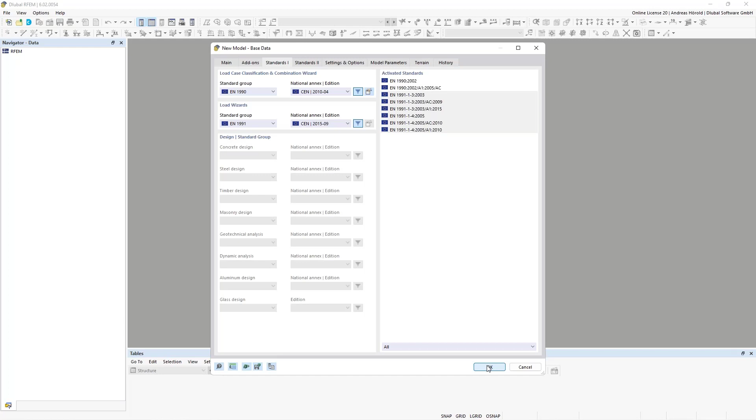So, at first I will modify the grid. At the bottom, right-click, edit. I would like to have a space between the grid points of 1 centimeter. Our connection is only 10 by 15 centimeters large, so I change the units for length from meter to centimeters. Then I change the grid to 1 centimeter.

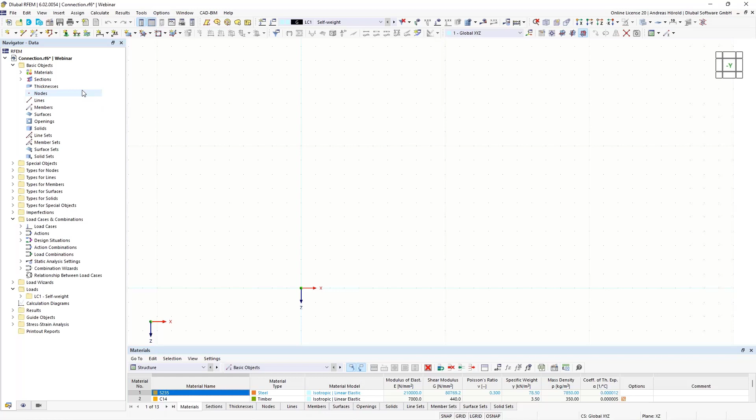Right above, I change the work plane to XZ, and I look in the minus Y direction. I zoom in, and now I can start here, left above, with a new line.

3 lines, 10 centimeters large, and I will stay in the dialog but change to arc, and draw an arc. That's all, and now we can create the first surface, the edge of the solid.

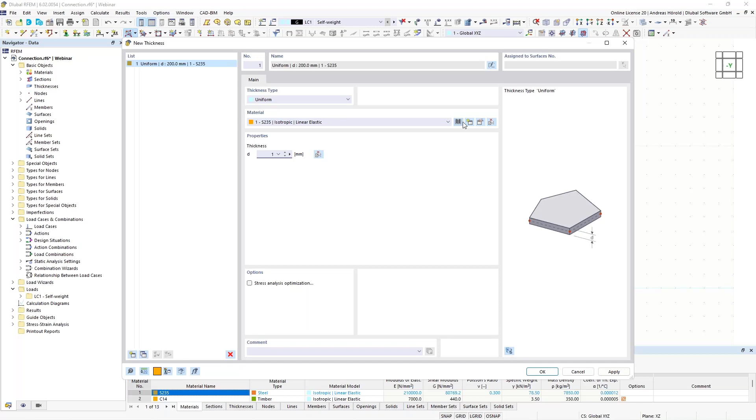Here, left above, I select the boundary lines. We have to define the thickness and the material with this button here, create new thickness. The thickness can be 1 millimeter, it doesn't matter, because when I create the solid or extrude the surface into a solid, the surface will be without thickness. The material is okay as the steel S235, but I'll show you where you can find it in the library.

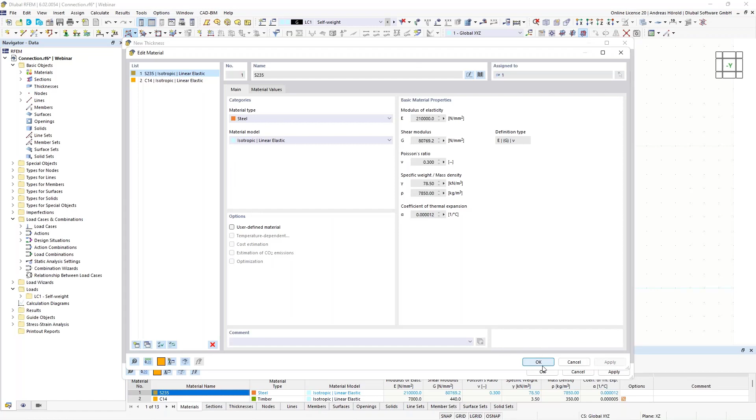European steel, and I select the steel S235. Okay, so I select the boundary lines, and the surface was created.

Then I create an opening here, left above, opening circle, with a radius of 2 centimeters.

So now, left above here, a new node. I create a new node on that point here. And I use, right above, the function connect selected lines, in that case at intersection.

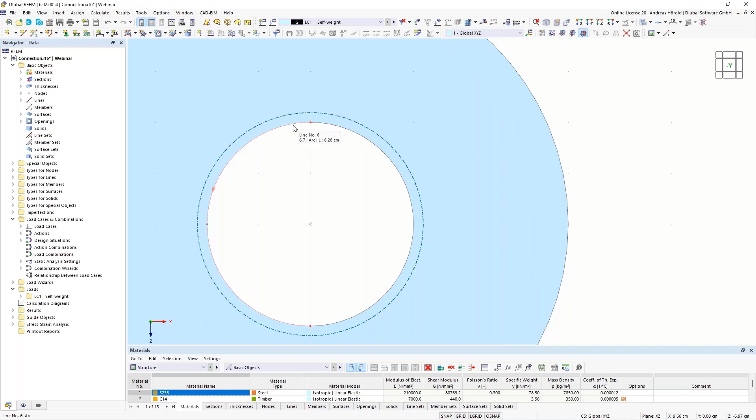Now the circle is divided and there are 2 lines. The reason for that is that later I will create the bolt, and between the bolt and that surface, or in that case the solid, I will create a contact solid, and the load on the bolt should be only on that side of the bolt - force in X direction. That's the reason why I did that.

Okay, now I create a solid: right-click on the surface and then extrude surface into solid.

And it depends on the surface coordinate system, in which direction is minus and in which direction is plus. In that case, in plus direction, it goes to that side. I switch, or I extrude it to the other side. That's why I select here or enter -7.

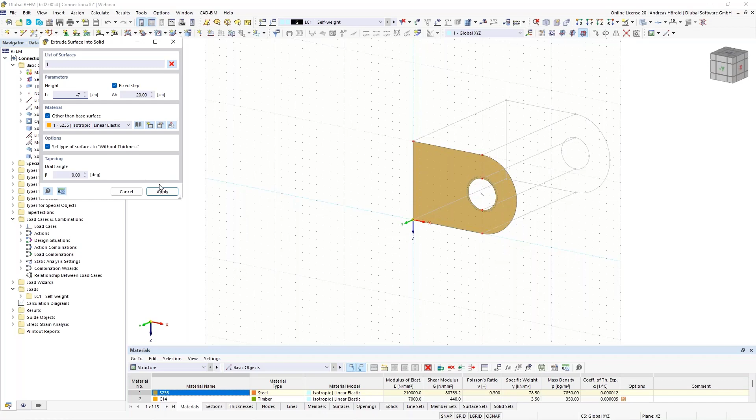Material is okay, and the boundary surfaces should be without thickness. I apply, okay, and the solid was created. And now the boundary surfaces are without thickness.

That means the surfaces haven't got any stiffness. So then I change to the view in -y direction again. So, or at first, I double click on the solid. That was wrong.

On that point. Or you can also search the solid here on the left side in the navigator data and double click or right click and edit the solid.

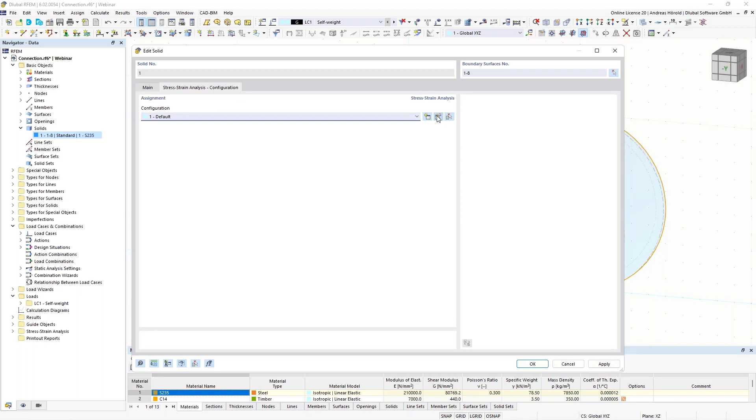So there's a stress strain analysis configuration. It's default at the moment. I would like to edit it to check that. Yeah, and it's quite okay.

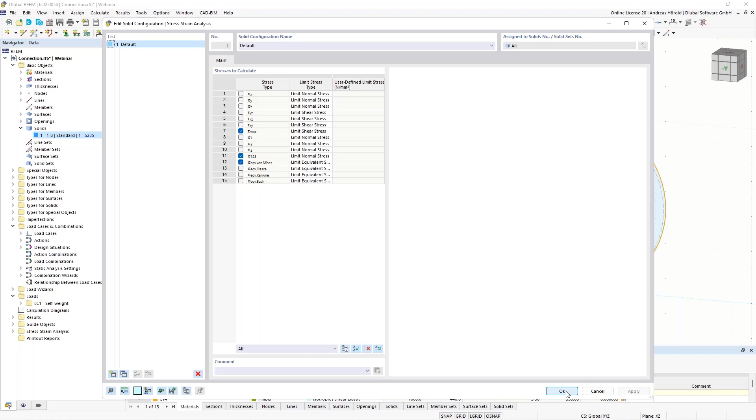Tau max, the sigma 1 to 3, and the sigma with the equivalent stresses. So, and those are the principal stresses, the sigma 1 to 3. Okay.

So now I create the next surface, a circle. No, that was wrong. The next step should be, I would like to create this solid. I will show you what I do.

Just a moment. I select that node here and copy it in minus Z direction, -2 centimeters. So I create a copy and change the work plane in

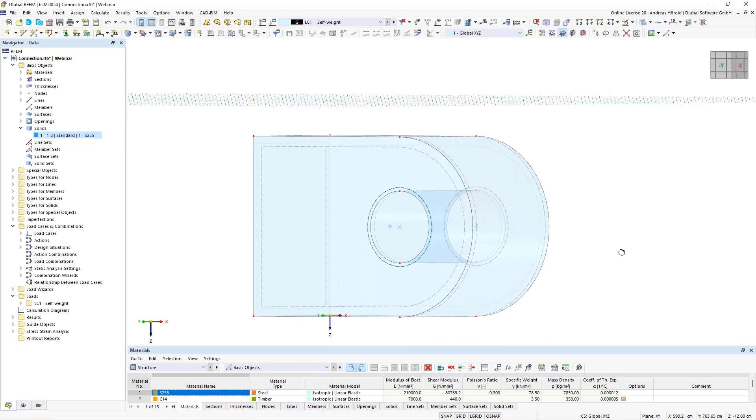XY. Okay. And I change the work plane origin to that side. Okay. So I deselect this solid, hide selected objects, and view in Z direction.

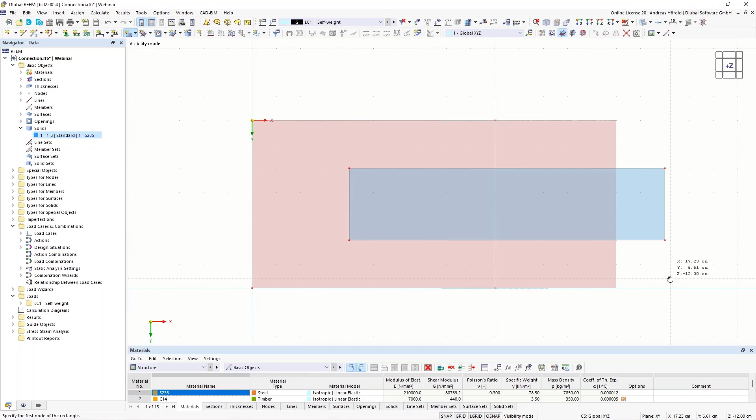So, and I create a new surface, a rectangle. Yeah, that thickness is quite okay. And from that point to that point. So, and I extrude it.

So, yeah, 20 centimeters are okay. Yeah, for that solid, we can choose, for example, material timber. Okay, because in the next step we will do the operation of this solid minus this solid with the Boolean operations.

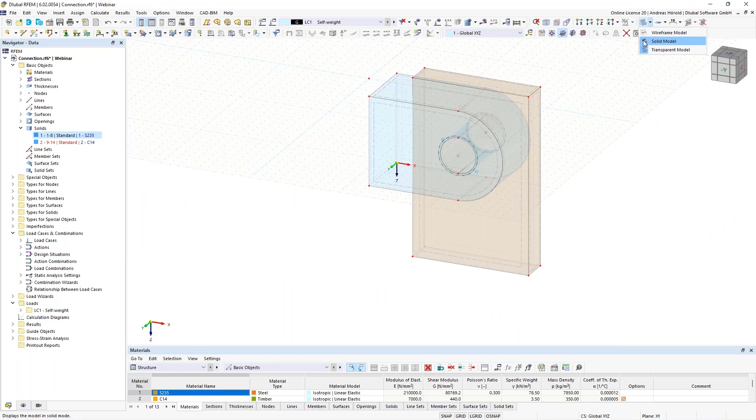So I cancel the visibility mode and so. Okay. So, and in the next step, as I said, I delete this node. In the next step, we will subtract this solid from this solid. So I right click on that solid and edit it.

So, and I choose the solid type hole. Okay. Can't be, that's okay.

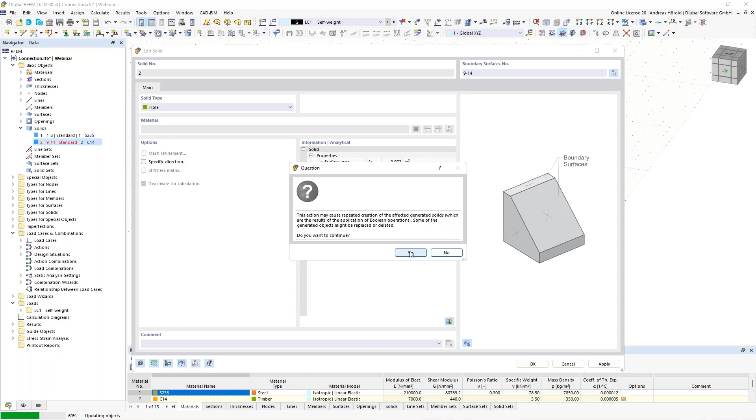So, and now the new solid was created. That's the original solid. That's the hole. And this one is subtracted by this one. And we subtract this one from this one, and that's the new solid.

Okay. So, and I do right click on the generated solid, edit, and on the left side at the bottom, I cancel the generated state because we would like to work only with this solid. Okay. So, and now we can delete the hole solid.

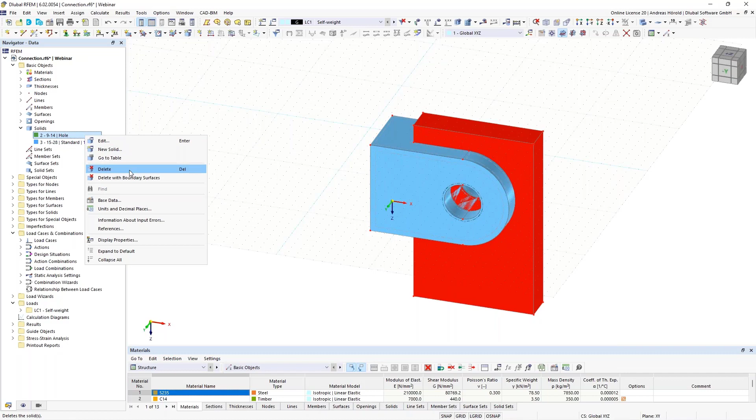Right click, edit. No, right click, and then not only delete, but delete with boundary surfaces. That's quite important. Okay. And now our main solid was created.

I can go in the table. Where are the solids? I delete those lines, delete row, delete row. Okay, now our solid is solid number 1. It's better for the overview.

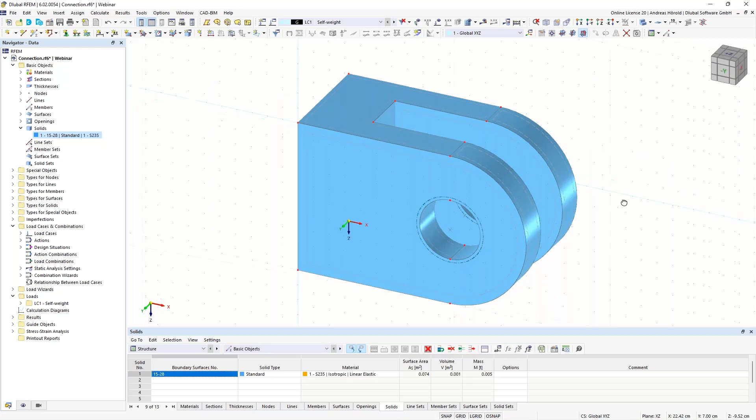So then the next step, I change the work plane to XZ and the origin to that point. Okay. The work plane is correct, and we take a look in -y direction.

So in the next step, we create the circle. With the same thickness and the same material, that's okay. So, and with a radius of 1.9 centimeters.

So, and we divide the circle with a line. I change to the wireframe model. Here left above with a new line. Okay, in the middle.

So, and then right above with the same function, connect selected lines at intersection. Okay, I can delete this line. And now the lines for the bolt are also divided into 2 parts.

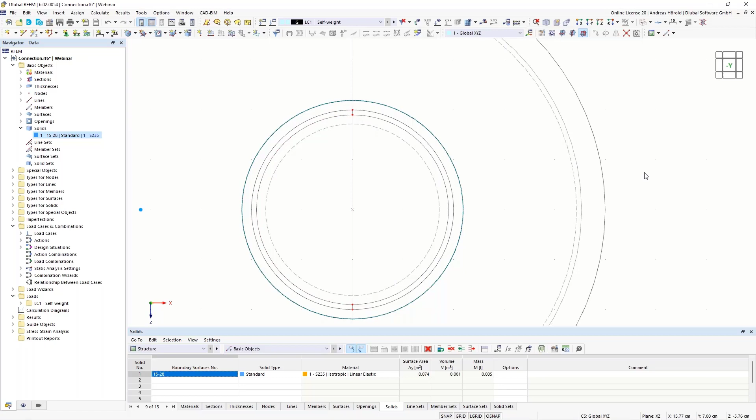So then I extrude it. It's better for the overview. I extrude this circle as well. Surface into solid. -2 centimeters S235. Okay. So.

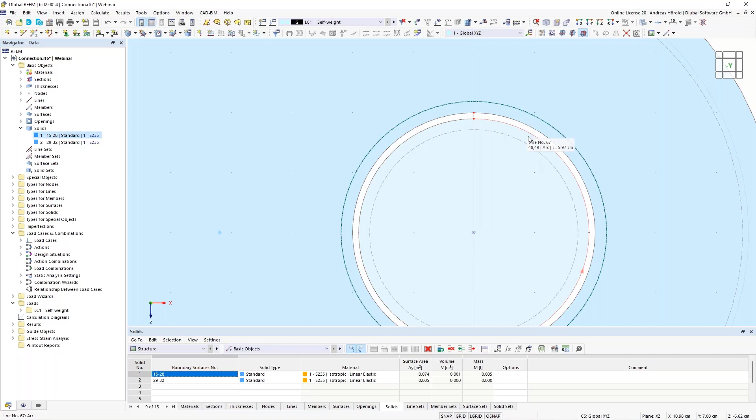And now I would like to create the contact solid. Only half here, such a ring in the space between this main solid and the bolt. And that space here. If you wouldn't have any space between the surfaces, those are the boundary surfaces.

And when you haven't got any space between them, you can create - I will show you - surface releases, such surface releases. But I will use the space for a contact solid. So that's why, in the next step, I will create the boundary surfaces.

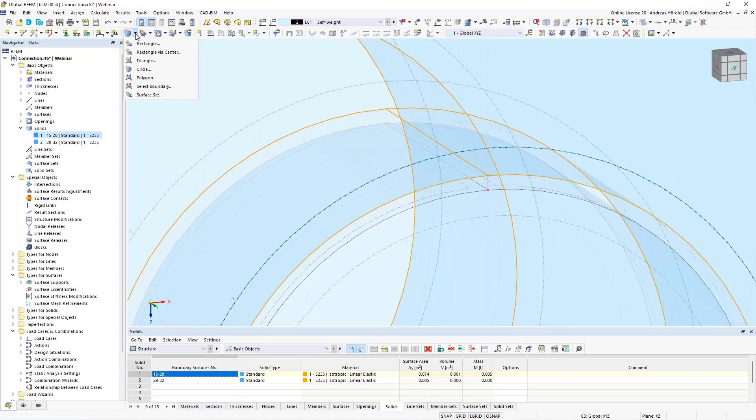I create a new surface, polygon in that case, without thickness this time. Okay. I start with this one.

Okay, so I zoom a little bit out and in, so the same at the bottom.

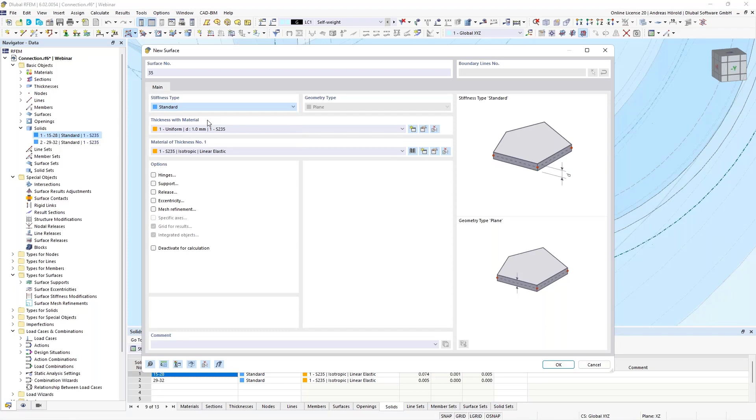Okay, then another function, select boundary, without thickness. I forgot to do it for width of that surface. I will change that later.

So, and I can double click on it and change it to without thickness.

So I copied that surface from that point to that point. Okay, so now all boundary surfaces are created, and I can create the new solid, the contact solid.

With that button here, set new solid, or you can right click here and define or select new solid. So standard, yeah, at the moment standard is okay. We will change it later.

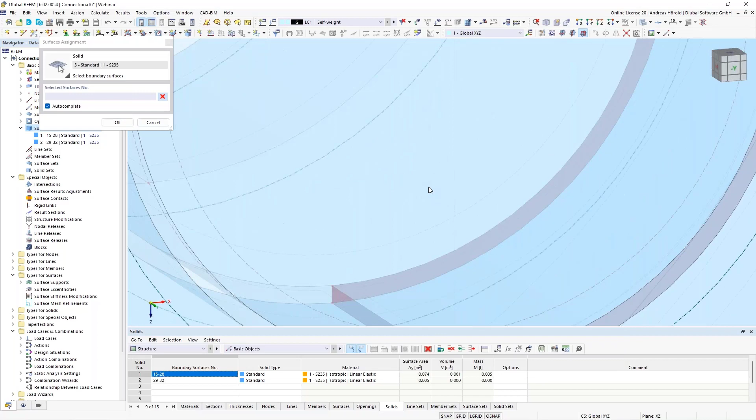I select the boundary surfaces, so this one. I have to deselect the autocomplete. So this one, this one, this one, this one.

Change to the wireframe model. This one, and only one is remaining. Okay, we can check it. So that's okay.

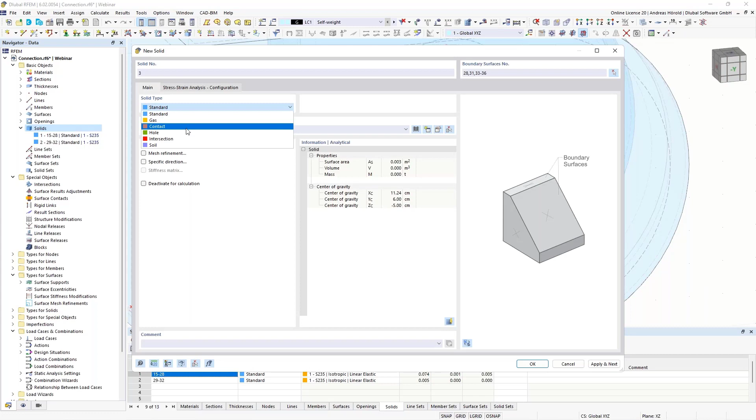Yeah, and we can also change it to the contact solid, and we have to define the contact conditions.

So with that button here, create new contact. There are different possibilities: full force transmission, failure under compression, failure under tension. We will use failure under tension, that the bolt isn't glued and at the edge of the hole.

So then here, rigid friction, yeah, you can see different possibilities. Rigid friction, yeah, I define a small friction factor. We won't have any friction in our system.

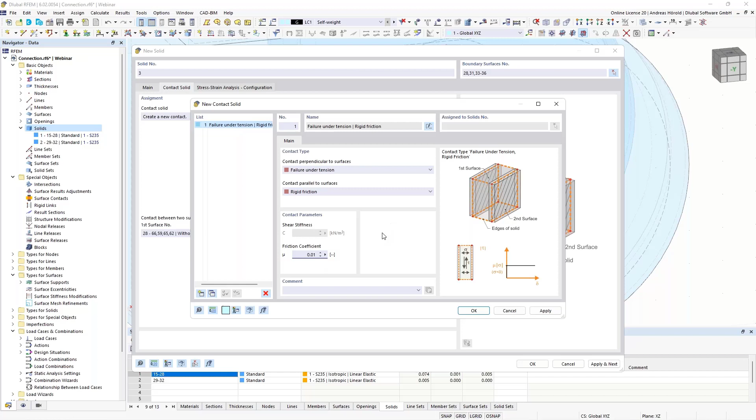Okay, so, and we have to define the opposite surfaces, that surface and that surface. There are already a proposal, 28 and 31. We have to check it.

Yeah, 28, and I have to go to the wireframe model. 28 and 31. Yeah, that's okay.

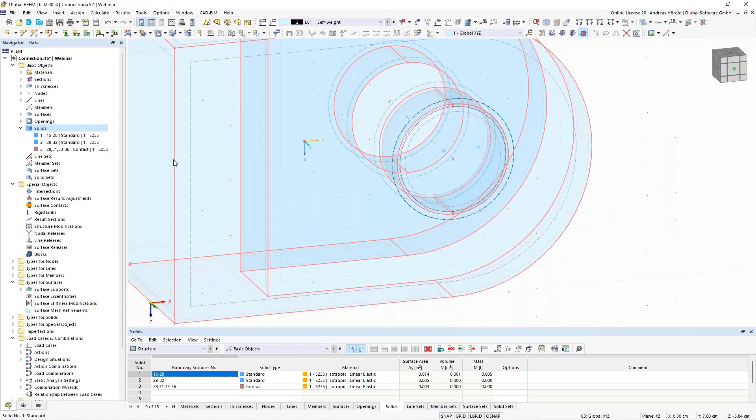So I can leave the dialog, and the contact solid was created. You can select it, and you can see it, yeah, in the space between the bolt and the plate here.

So now I mirror the contact solid with that function here, create copy. YZ is the plane, and I select the point in the middle of the circle.

Okay, that's all. That part of the bolt and the contact solid was created. So I copy the complete bolt to the other side.

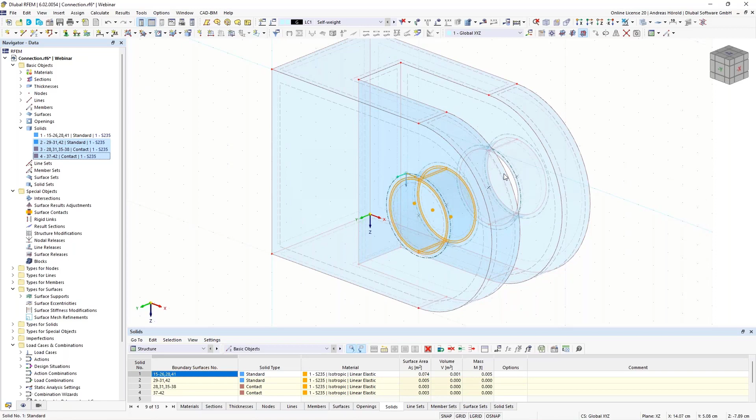Copy, I have to change the vector from here to here.

So, and in the next step, I have to fill out the space and the overhang. I enlarge the bolt here.

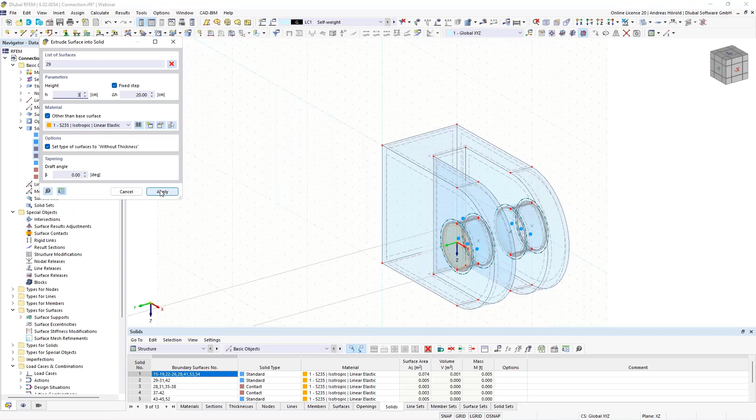So with the extrude function, 3 centimeters, S235. Okay, same on the other side. That goes quite quickly.

So minus 3. Okay, and the space here. Also minus 3.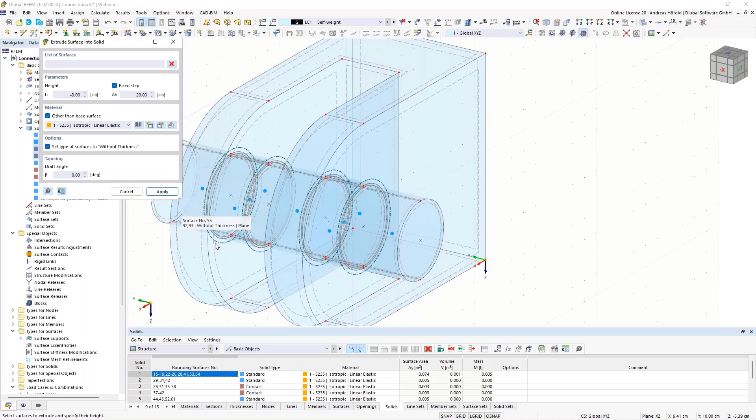So the model is complete. What is missing? Yeah, we will support in the first step that surface, edit surface, and I add supports.

Here above, I change the dialog, support, create a new support. Now it should be rigid in all directions, or fixed in all directions.

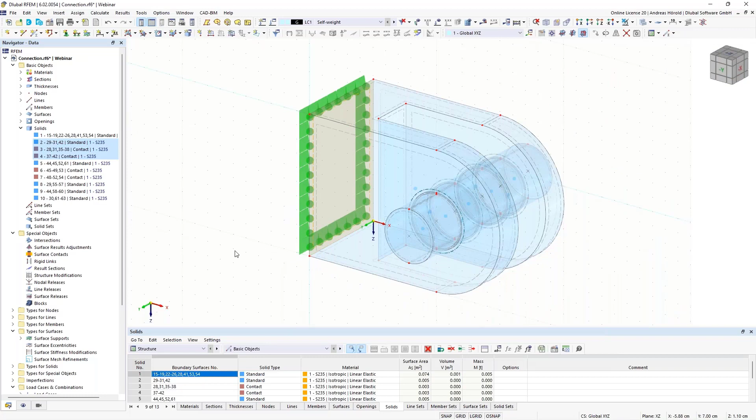So, and now, yeah, for that we can check if the model is complete and is okay, we calculate the self-weight load case that was created automatically. Yeah, it should be fine.

So, and you can see there is a quite rough mesh, and I would like to show you a function or a feature. So in the navigator display, you can see the mesh.

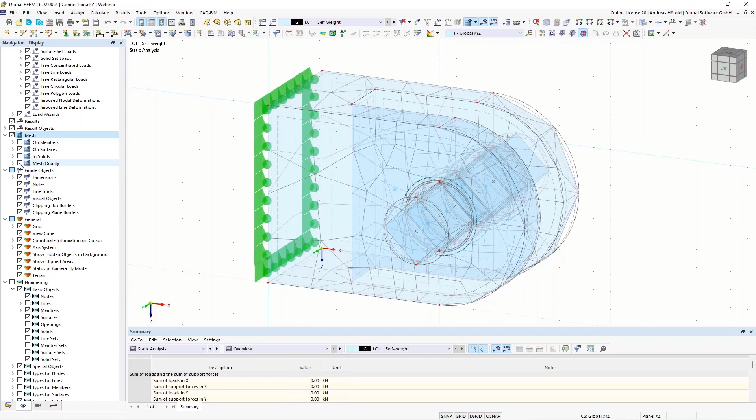You can disable it, and I would like to introduce that setting here, or that function, mesh quality. Where is my panel? That's on the other screen. Okay, and when you click that button here, you can see the mesh quality.

Yeah, 80% are okay, 20% are a warning. That's quite clear with such a rough mesh. I can show you the mesh settings. Yeah, that's quite rough.

We change it to 1 centimeter, and you can see the quality criteria for the solids in the dialog here. If you have a ratio larger than 1 to 20 for the sizes of the mesh or of the element, then you will get a warning and a failure with that aspect ratio and parallel deviation and so on.

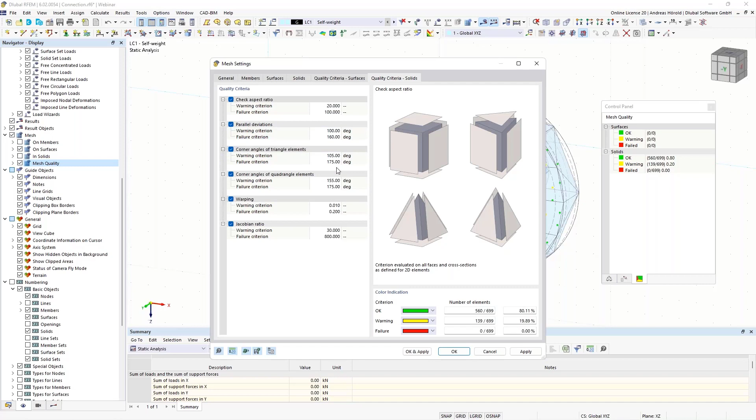Okay, and apply. The program creates a new mesh, and you can see 99% are okay, only 1% deliver a warning.

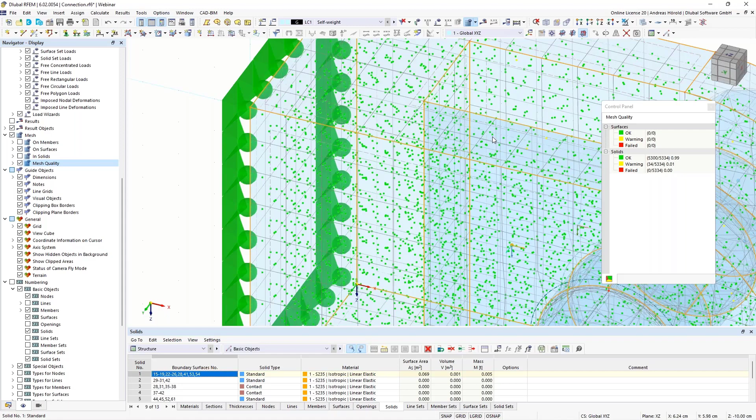Yeah, I will calculate with that mesh because I would like to get a short calculation time in that webinar. Actually, we recommend minimum 4 or 5 elements on the smallest side here. At the moment, there are only 2 elements, but for the webinar and to save calculation time, it's quite okay.

I can disable the mesh quality. Okay, and I can also, with that setting here, disable the mesh.

Okay, then we have to apply a load on, as I already mentioned, on that surface and that surface and that surface. Okay.

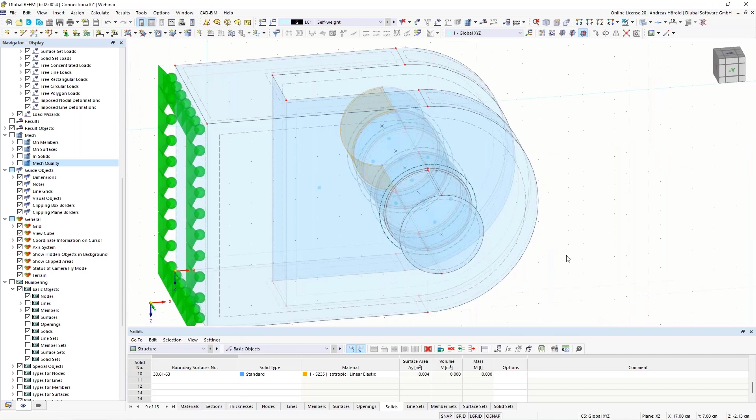So I would like to apply a load of 3 loads of 35 kilonewton, but I have to apply it as a surface load. That's why we have to calculate the surface load.

I measure with a double click. I can edit the surface and it displays the area. To have the exact value, I have to go to the left side at the bottom and change the units and decimal places for the areas here to 6 decimal places. Now I can write down the value here for surface number 57.

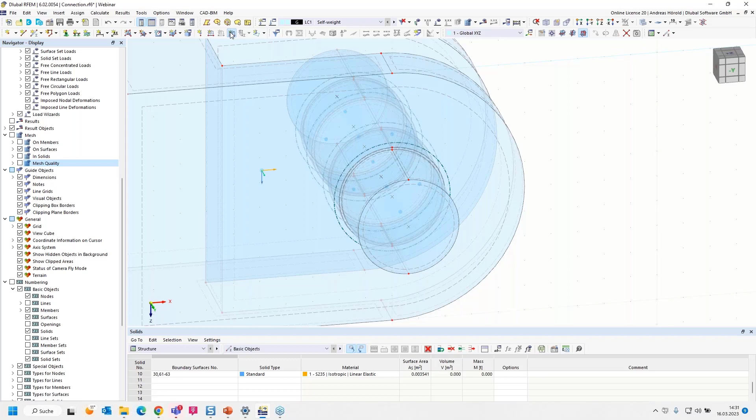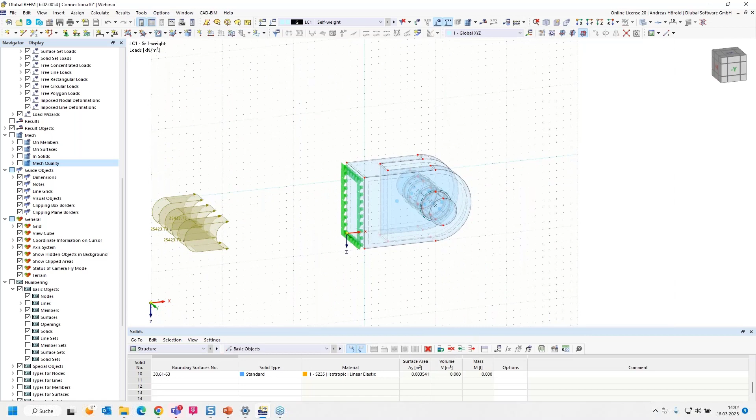Okay, so we can move the load a little bit. You can also find the load on... I have to change the taskbar so that I can see all. In the navigator data, you can search for the load. At the moment it is the self-weight load case, we will change that. I can see the surface load here, and if you double click on it, we reach into the same dialog.

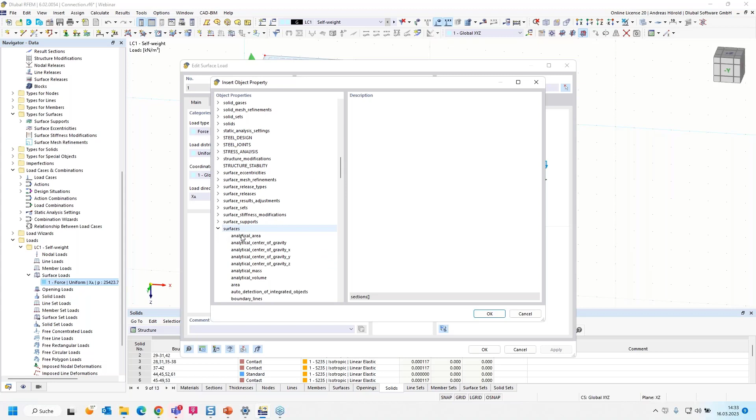I would like to show you another possibility to calculate the surface load with a formula. So I enter 45,000 Newton, SI units - we have to use SI units - divided by, and here with the info button, you reach a table with different object properties. So I search for surface, then surfaces, other surfaces, and area. I enter area number 57.

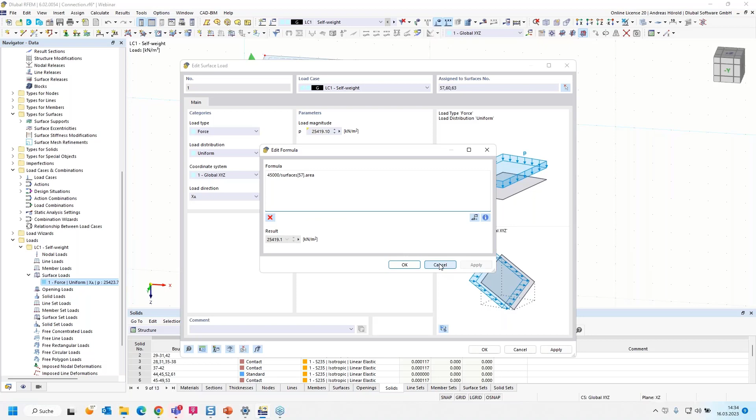And you can see the surface load was calculated, and there is a small difference, only a small difference, but that is the correct value. If you want to change the load later, you can go to the formula and only enter the load here. I think it's a really good feature.

So in the next step, I go to load cases and combinations. That's the current load case, I call it FD. We apply loads with safety that already contain a safety factor. So then for the design situations, I delete the design situations for the serviceability limit state. We only work with the ultimate limit state, and we have to activate the stress strain analysis for it. Although we have only one load combination, one load, we have to create design situations because you can only activate the add-ons for design situations in RFEM 6.

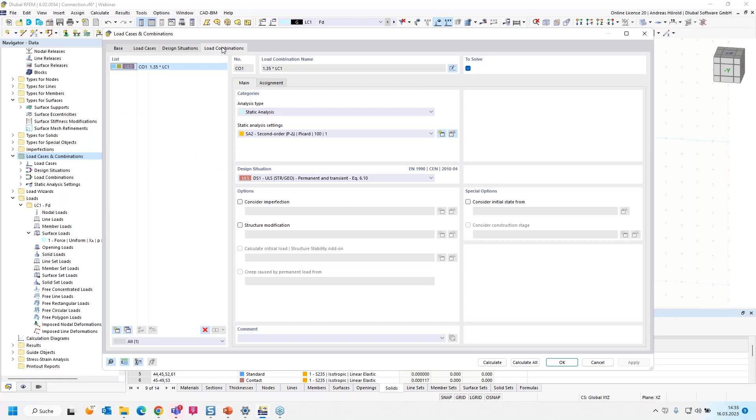Okay, I turn to the base data. I disable the combination wizard and keep the load combinations. I only change the safety factor because we already have got design loads. So the design situation contains only this load case. And then we can calculate all.

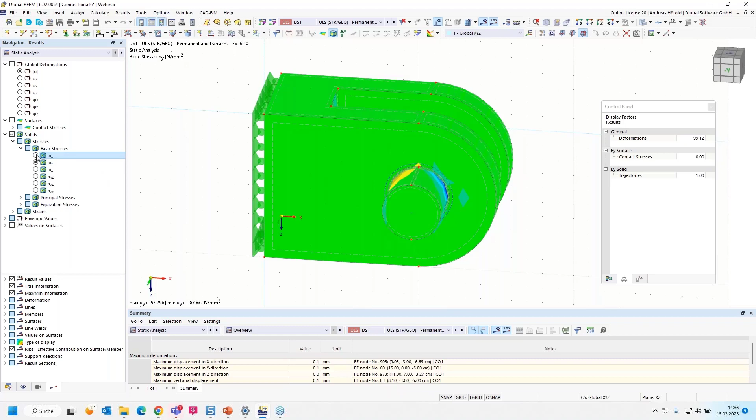So we take a look at the solid results, for example sigma x. You can see on this side of the bolt is pressure, here tension for the sigma x, and there's no tension on that side.

We can also take a look at deformation, and we can also animate it. Okay, let's disable the contact solid.

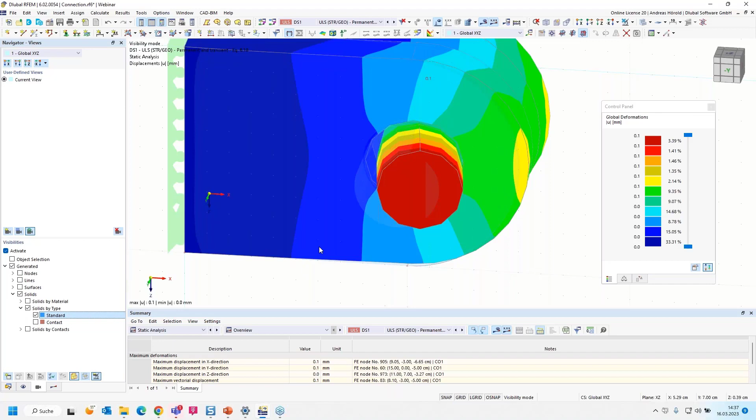Here, left at the bottom, the views - there we can find the visibilities, and we select the visibility for solids by type, and we display only the standard solids. So we take a look in -y direction. Okay, and I can animate it again.

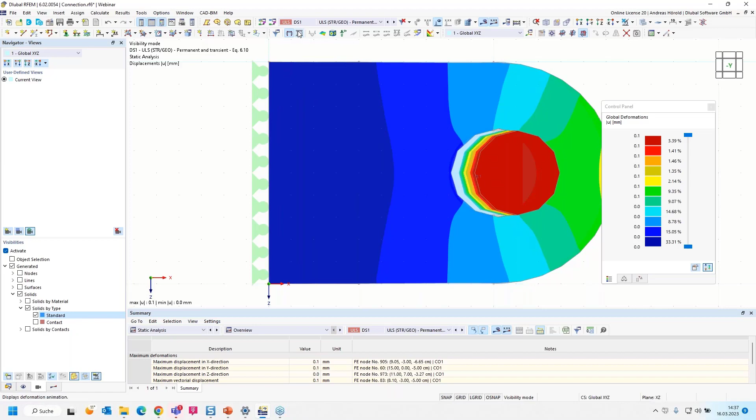And you can see the bolt can be released from the edge of the hole because of the contact solid.

So then we can also take a look at the bottom on the table, stress strain analysis. Okay, configuration is deactivated, I have forgotten something. We have to define for all the standard solids, by right-click, the stress strain analysis configuration. We use the default setting for all of them.

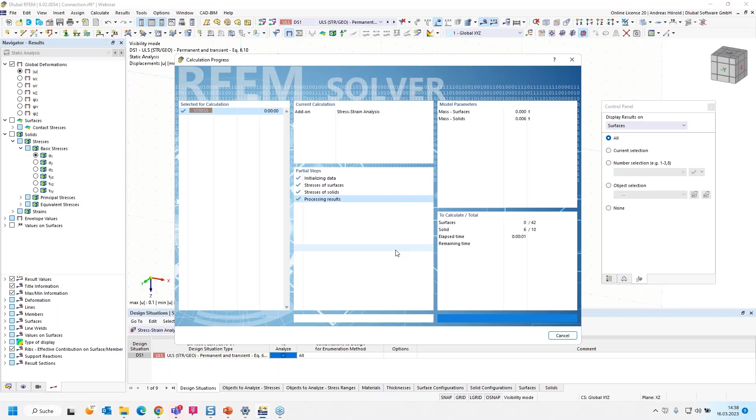Now we have to do the stress strain analysis again. Yeah, those are the results. The maximum stress ratio is for the principal stresses sigma 1, 2, 3, that's tau max, and those are the equivalent stresses. Yeah, we did an elastic design.

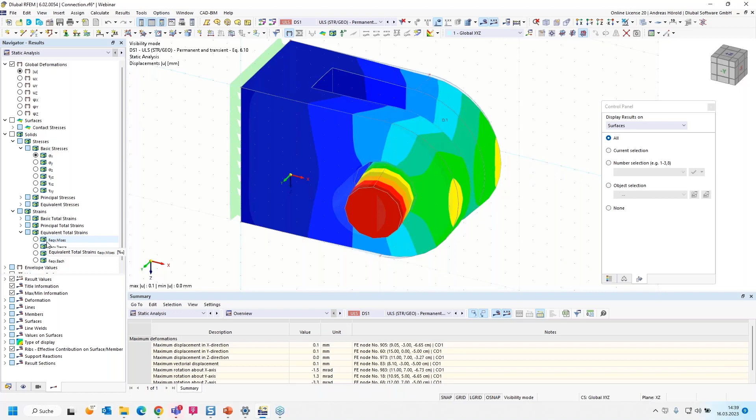If you perform plastic design, you can apply, in my eyes, higher loads, but then you have to check the strain in the static analysis - strain equivalent total strains. When you do a plastic design, the maximum plastic strain should be 5% according to Eurocode. At the moment we have got only elastic strain of about 0.1%.

Okay, so in the next step I would like to define the line welded joints. Cancel the visibility mode. Okay, I delete the support.

So I copy that surface here with the same function that we already used - move and copy, create a copy, -2 centimeters, in that direction 0.

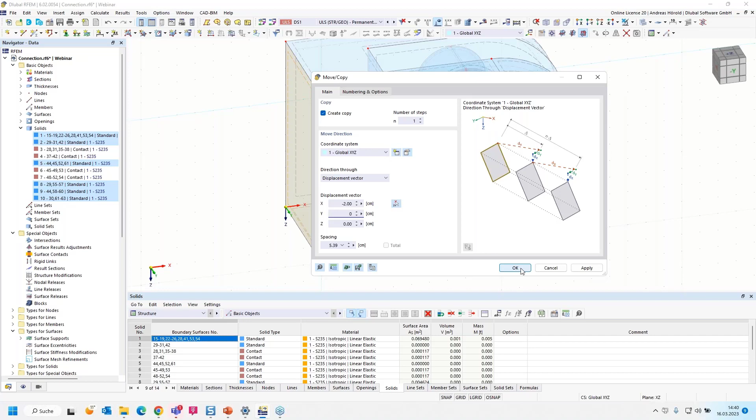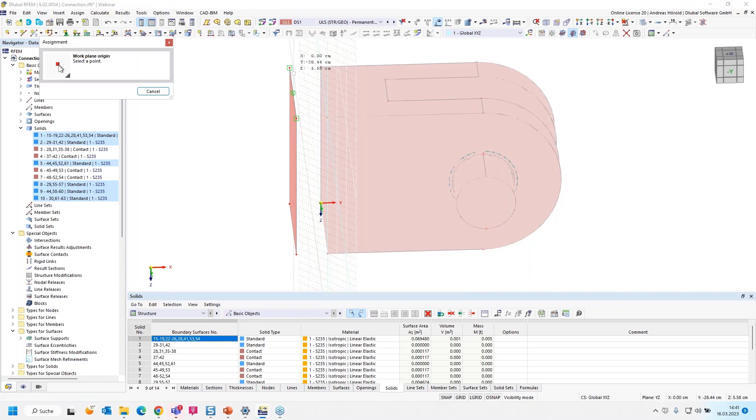So I would like to increase the size of the plate. Just a moment, I disable or hide the selected objects. Change the work plane to YZ, new origin. Okay, and I take a look in X direction. So, and I can drag and drop the nodes.

So I only have to change the setting of the surface. Double click. At the moment it's without thickness. I change it to standard, and I create a new thickness.

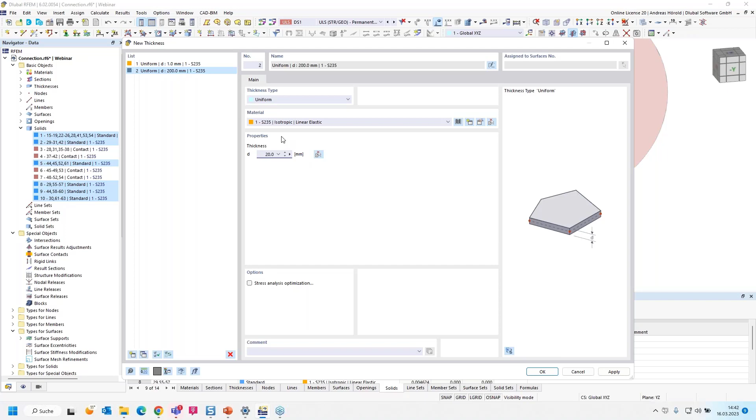20 millimeters. Okay. S235, that's okay.

So now I moved that plate here because we can't create a line welded joint on a surface without thickness. That's why we have to create a surface with thickness in that space here.

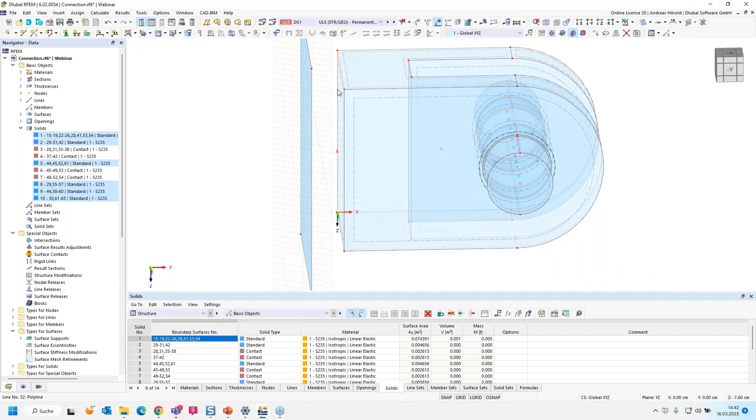So I cancel the visibility mode, and I select the 4 lines with the control key. Okay, I copy them, minus 2 centimeters. Okay.

With that button here, a new dialog is opened, and I can select linked lines with surface. I select the template, we are the same, we use the same thickness, 20 millimeters. Okay, and now the space is filled.

So now on the left side in the navigator data, you can find the types for lines, and here the line welded joints. By right click, I can select new line welded joint.

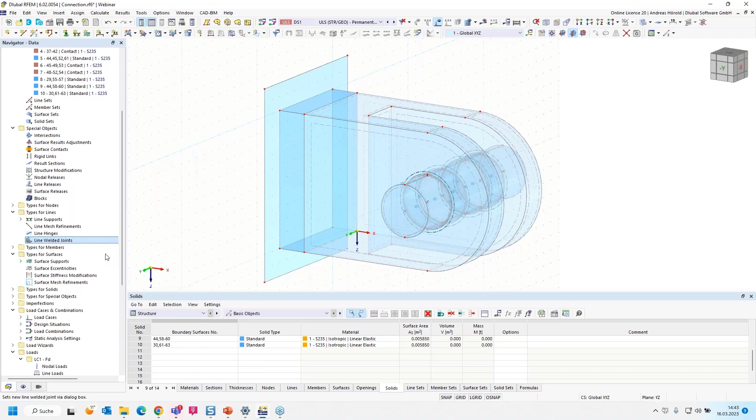So we have to define the joint type. There are butt joints, corner joints, and you can see the preview on the right side, the lap joints, and the T-joint. We will use the T-joint, in our case single fillet. That's okay, continuous. And I define a weld size of 10 millimeters.

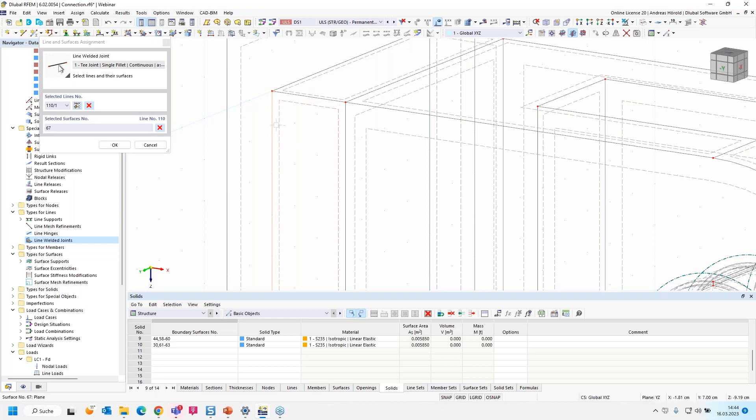And I have to select the lines and surfaces. So I change to the wireframe model. At first I have to select the line, then the area to be connected, and then the base plate. So add new object here on the left side, same procedure: line, area to be connected, and the base plate.

So we have to do that 4 times. Line, surface number 1 and surface number 2, and also here.

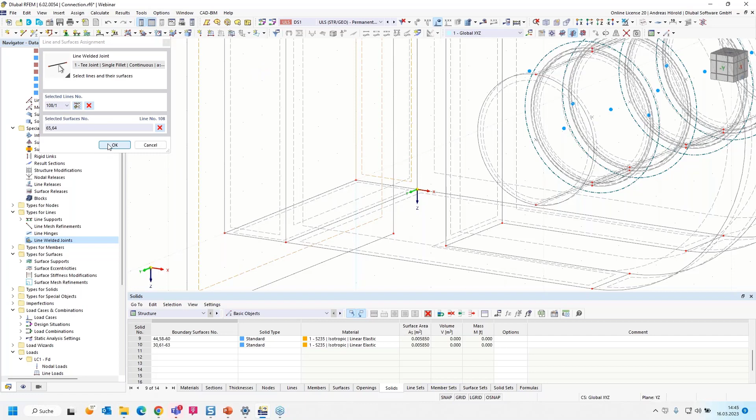Okay, 64 is the base plate. It's on the right side, and it should be okay. So those are the line welded joints.

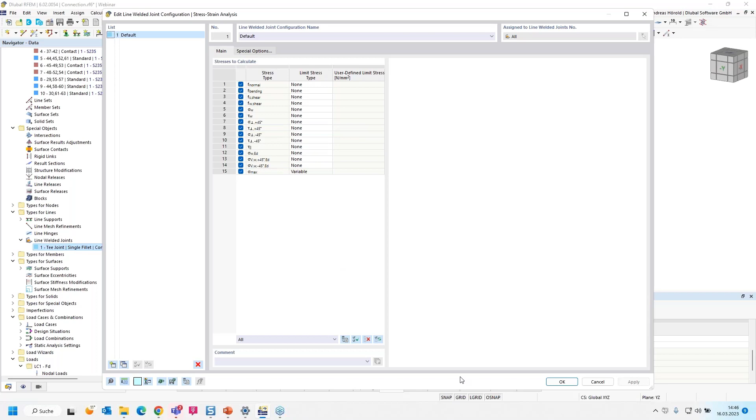I go in the dialog again, and we have to define the stress strain analysis configuration. It's by default, we can edit it if we want. Yeah, that's empty because, as I said at the beginning, the stress strain analysis add-on doesn't calculate according to a standard. You have to calculate the limit stress with the certain correlation coefficient according to the standard.

So we perform a stress strain analysis again. Okay. I forgot to support the plate here. I double click on it. Support, rigid. Okay.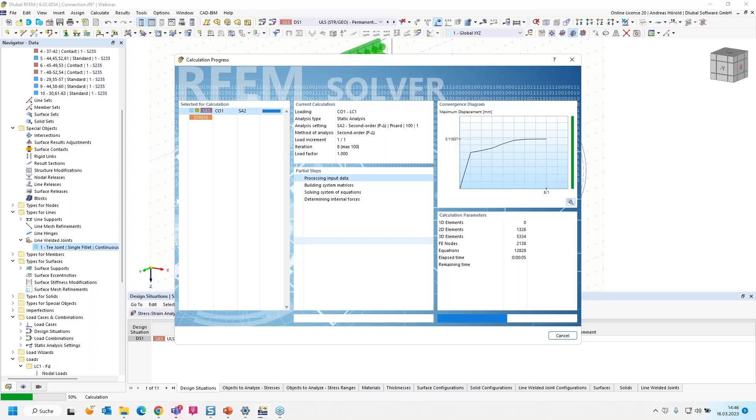So, next try. With the rough mesh, we get the results immediately. So those are the solid stresses. We can also go to the table, stresses on solids are the same results as before, and here the stresses in the line welds.

Okay, yeah, that's all. Change it to this one. Yeah, and you can use different options for the result evaluation.

For example, when you go in the navigator data and the guide objects, there are clipping planes, clipping boxes, and so on. To print it, maybe in the printout report, you can also use the result sections.

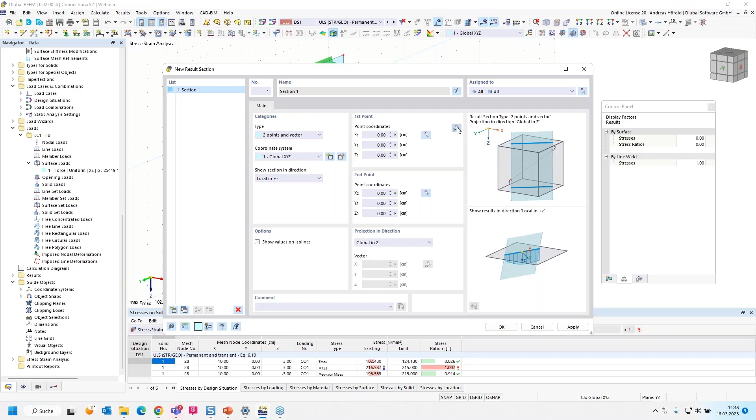Also here above, new result section. Let's create one or two sections. I create the section with 2 points and vector. Okay, I select 2 nodes, for example this one and this one.

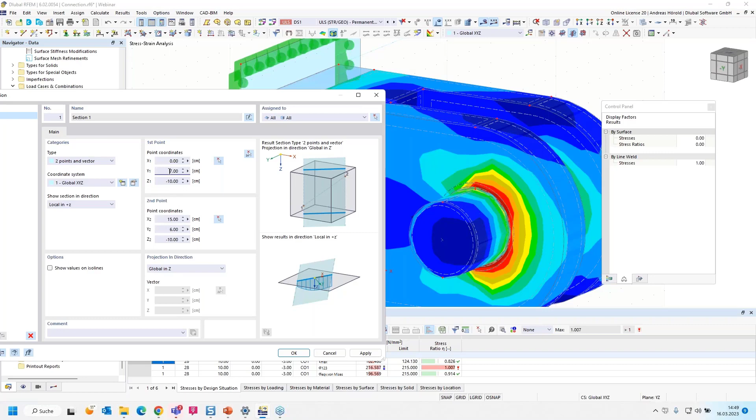And we can modify the values. For example, the X value from 10 to 15 for the second point. And if you want to get the results in the middle of that plate here, we can also move the section in minus Y direction. That's why we enter 6 here instead of 7, and apply it.

Okay, so in the result navigator, we can find the result sections, and I can activate it, and you see the results for the different stresses.

So let's create another section. Maybe we would like to create a section in the middle of the board here, a horizontal section. I can double click, for example, on the result section and copy this one, and change the projection from Z to Y.

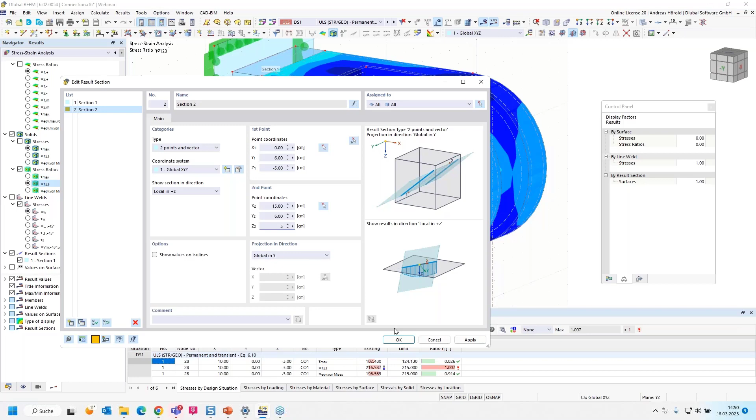And I have to change some values, not minus 10 at the top, so not in the middle, but minus 5 centimeters in the middle. Okay, yeah, that's all. Okay.

And if I only activate section number 2, I can take a look at the results. Yeah, and then you can print such sections in the printout report. And in that case, here seems to be the maximum value.

I print only this view here in the printout report, but for example also for the principal stress, tau stress, and the equivalence stress. How to do that? Here left at the top, print graphics to printout report.

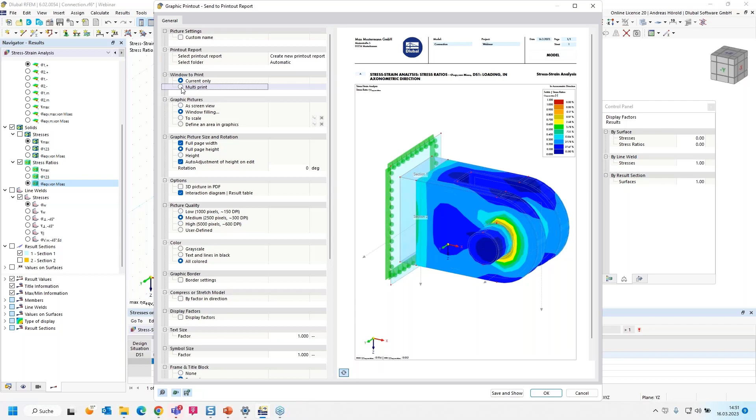So at first we define window filling, and you can print the current view only or use multi-print. Let's use the multi-print option.

Then we have to click on the different dialogues here. For the model, I use the current view, then in Z direction, in -X and -Y direction. And the loads, only load case number 1 in the current view.

And the results of the add-on. Now we don't need those results, only the add-on: solids, the stresses tau, sigma for the principal stresses and equivalent stress, in the current view.

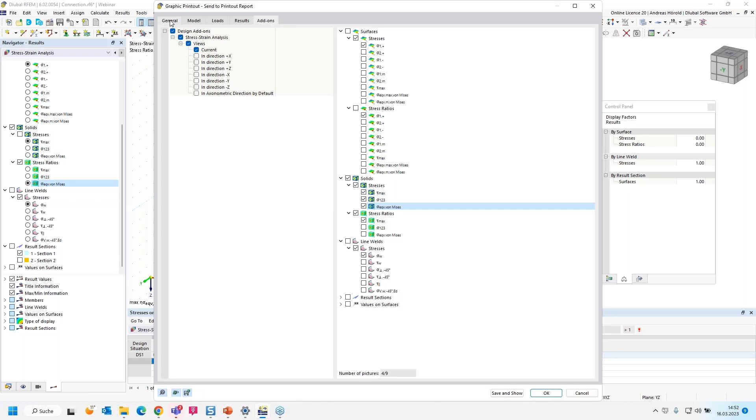That's okay. If we switch to the general dialog here, it takes a short time to create the images. Then we have got a preview of the model in the different directions, then the loads and the different stresses.

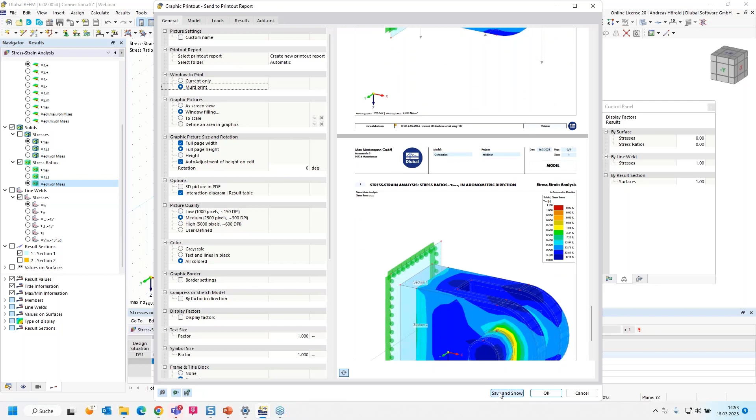So then we can save and show the printout report. You can give it a name, and you can select the items here, for example the line welded joints.

Then for the stress analysis, we can deselect the stresses on surfaces. The surfaces were only help surfaces for the line welded joints, but we select the stresses on solid by solid. That's quite okay, and we can generate the printout report.

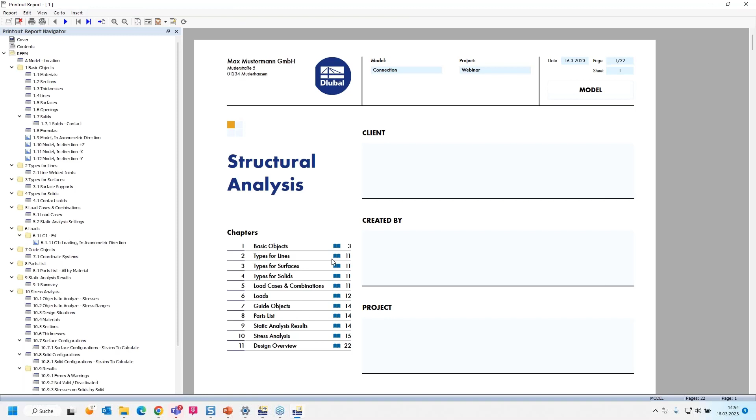And that way, also with the multi-print function, you can print different other views in the printout report. So let's take a look, for example, at this graphics.

Now we saw it already. Then the line welded joints, we can zoom in a little bit. Those are the parameters: the weld size 10 centimeters, surface supports, the contact conditions, failure under tension, rigid friction, and so on.

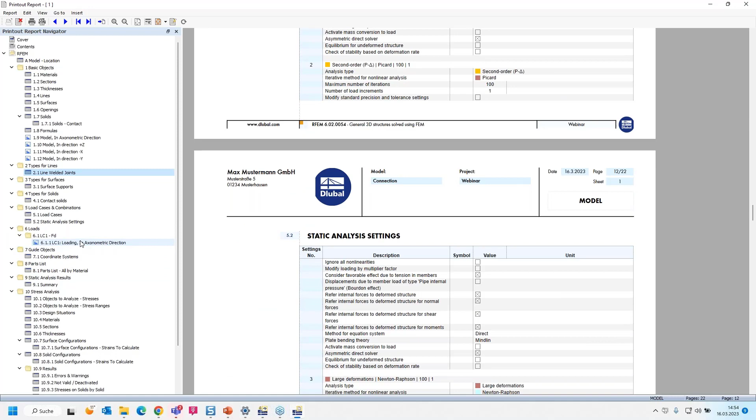Then the loading. Then the stresses on solids, the different parts and the belonging stress ratios.

And the stresses in line, welds by line, and the graphics for the stresses.

Okay, yeah, that should be all for the presentation.